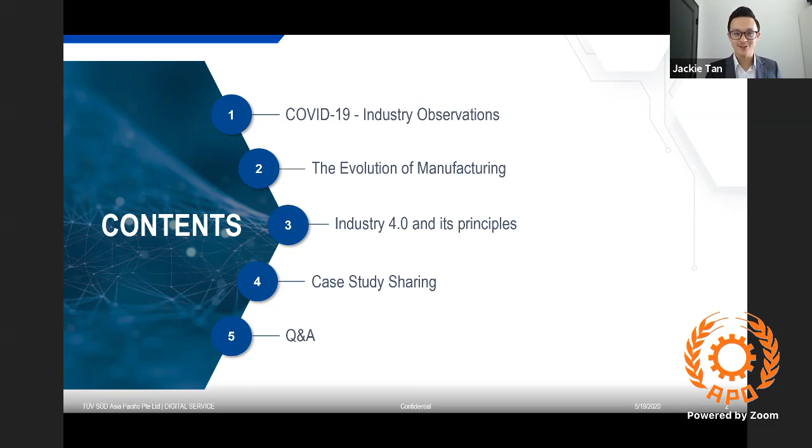First of all, industry observation in this pandemic time. So what do we see right now in this pandemic time?

What we believe is that 41% actually are trying to identify where and how they could start their transformations. We also see that 41% of manufacturing really lack of focus. They struggle or they're struggling to understand what is actually Industry 4.0. And due to this pandemic time, there's a lack of focus for companies or even for manufacturers to identify projects.

Based on our observation, we see companies right now are working on ad hoc projects, and very much we see companies are really working on silo projects to address current needs. In addition to that, we also see companies are having difficulties in resource management. Due to several instances, we also see that companies are struggling to manage their workforces and to manage the supply chain. And very often, companies are acting with an unclear and reactive approach in this pandemic time.

Now, beyond that, we also see that 23% actually of companies right now are in the midst of defining a blueprint, how they could transform their organizations. Now, this 23% may seem relevant, but we also see that many companies have missed the opportunity, or in fact, they are missing the opportunities because simply there's a delay in them defining a roadmap or even defining what is relevant for them.

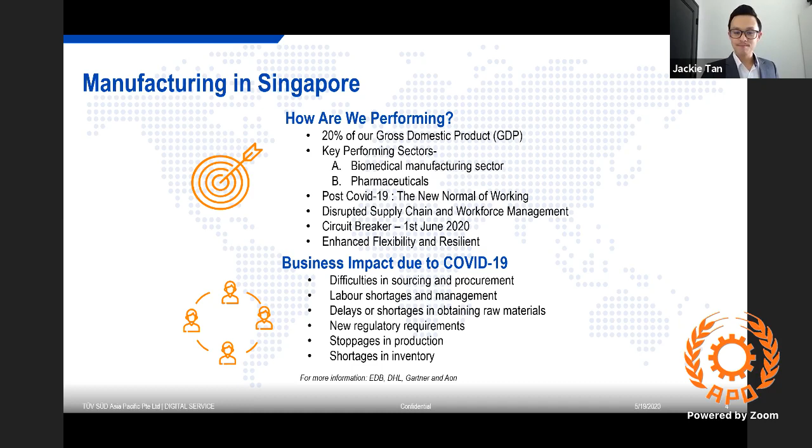Now I would like to share with you a slide. What could be the future of manufacturing? If you were to see my slides right now, there are about 7 points or 7 business functions that I'd like to share with you.

They are namely IT and data collections, manufacturing process and design, asset and equipment, quality, supply chain management, workforce management, and finally enterprise processes.

I will go through one by one just to share with you what is the current state and what could be the potential future state, due to digitalizations or even due to moving into integrations of Industry 4.0 to the specific business function.

Number 1, for IT and data collections, currently we do see companies are still collecting data offline using analog tools, and they use IT systems to improve critical operating parameters. There are companies today, and largely companies today, especially the SMEs, are still working using offline data collections and IT systems to improve critical parameters.

And in the future state, we also see companies have now deployed real-time system analytics and intelligent sensor control to enable flexible manufacturing operations. So if you would like to really push your factory, transform your factory towards what we call flexible operations, do look into how you could achieve real-time system analytics and intelligent sensor control for your factory. That is where we see what could be the future state of companies, and we have seen this actually deployed in several factories.

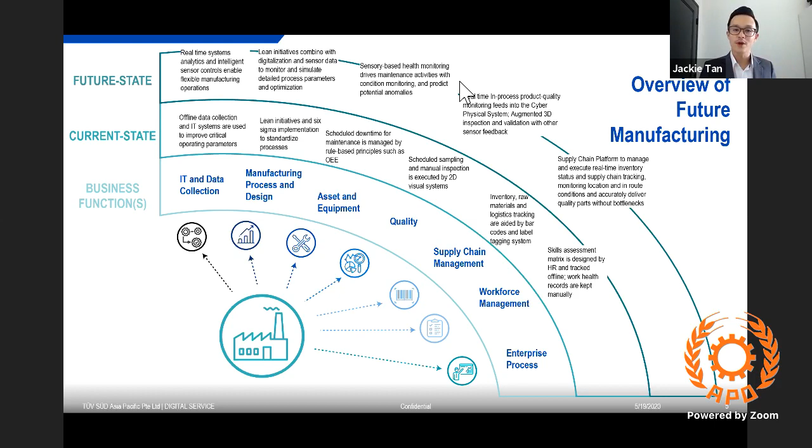Workforce management: typically we see companies deploy skill assessment matrix tools, which is just basic enough for companies to know whether their workforce is capable or able to perform certain tasks.

As a future state, we see companies have deployed regular continuous workforce management, and there's also real-time monitoring of workforce health management using RFID tech or certain sensors, to ensure the workforce is always ready to perform certain tasks.

Finally, enterprise processes. Today, many enterprise processes are performed using analog tools such as Excel, paper-based methods, or even emails. Enterprise processes are typically your administrative tasks.

In this pandemic time, this is the biggest challenge for companies, because very often we are used to pen and paper, emails, phone call communications. And when it comes to less face-to-face meeting, there's a need for more effective digital tools to foster enterprise management.

This is where we have seen companies now automate enterprise processes using computer-based systems. My recommendation for you is to look into how you could deploy robotics process automation in your organization.

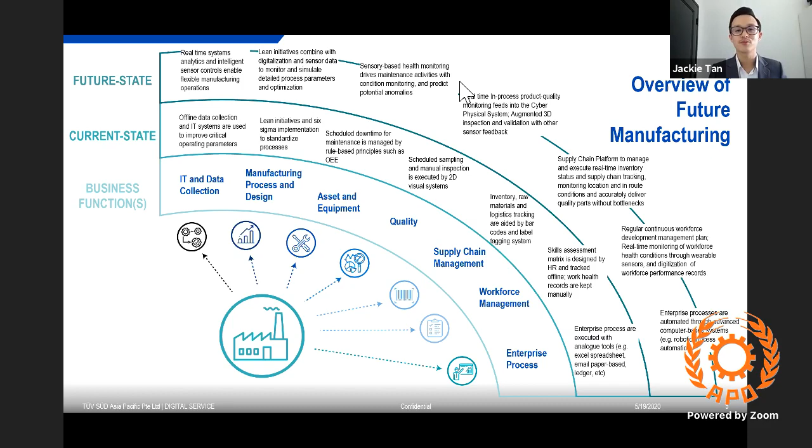Now I will just quickly touch on the concept we call horizontal integration. If you are a company that really wants to adopt a resilient or flexible supply chain, horizontal integration will be a key concept for you in order to adopt this resilient supply chain.

What we mean by that is a concept where companies should look into how they could optimize the flow of data and products from suppliers through the company and to the customers.

The benefit simply is that it helps companies improve and increase their supply chain resilience, such that they are able to monitor real-time performance of their upstream suppliers all the way to the downstream customers.

Second point, it helps you improve your workforce efficiency, such that as a company you are able to plan and execute processes more efficiently and even with real-time execution capability.

Third point, agility. If you were to adopt horizontal integration, it really helps you be agile. It enables you to make real-time decision making via simulation of scenarios.

There's a lot of information in this topic. Unfortunately, due to time constraints, I'm not able to share with you more about horizontal integration. I hope to have the opportunity next time, together with APO, to give you a masterclass on what horizontal integration actually is. But if you want to do your own research, check out what we mean by horizontal integration, especially in the context of Industry 4.0.

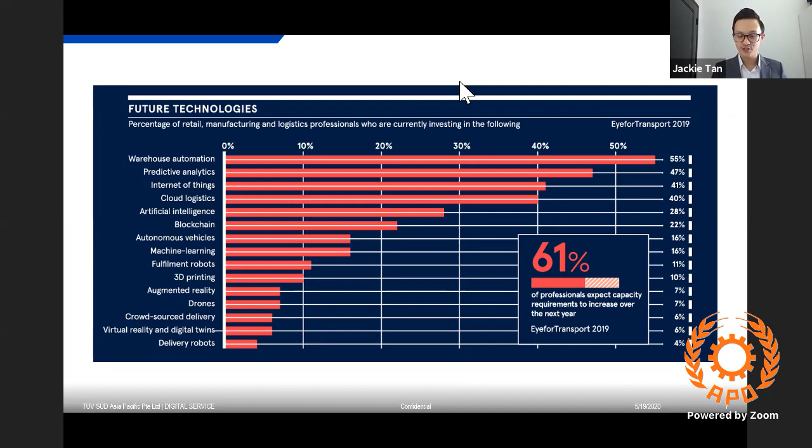Now let me share with you a quick case study about a flexible supply chain deployed by one company. This company is a German company - as you know, TÜV SÜD is also German, but this is a different German company. They have about 33 factories globally and about 47 warehouses globally as well. They produce fast-moving consumer goods, ranging from beauty care to laundry and home care, so some of the products you see might be easily recognized by you.

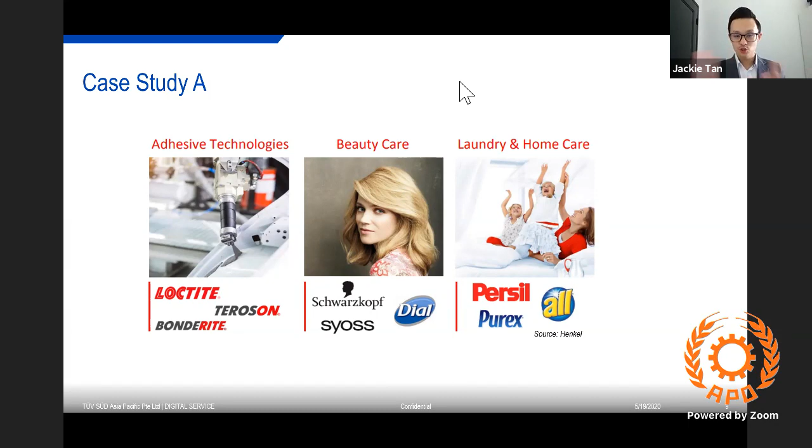This is one of the case studies where they deployed a supply chain platform to enable end-to-end digitalization. This company is a world-leading chemical and consumer goods company. Their major divisions are laundry, home care, adhesive technology, and beauty care. So this is typically an FMCG company.

One of the key challenges back then was that market demand required them to be faster, cheaper, and have more agile processes - no longer very rigid production processes. There's a demand due to fast-moving consumer goods; they have to be faster, cheaper, and more agile. There's also a need for them to improve OEE.

Very often, every factory has their own OEE, and they would like to know how they could monitor OEE across all 33 manufacturing factories. Of course, since they are making chemical products, there's a need to look into how they reduce specific energy consumption and further enhance sustainability.

The third point - the company has a challenge to look into visibility and transparency. There's a need to adopt an agile and lean approach to ensure they don't get left behind in a competitive and dynamic market. So these are the top 3 challenges the company would like to address as part of their transformation towards Industry 4.0.

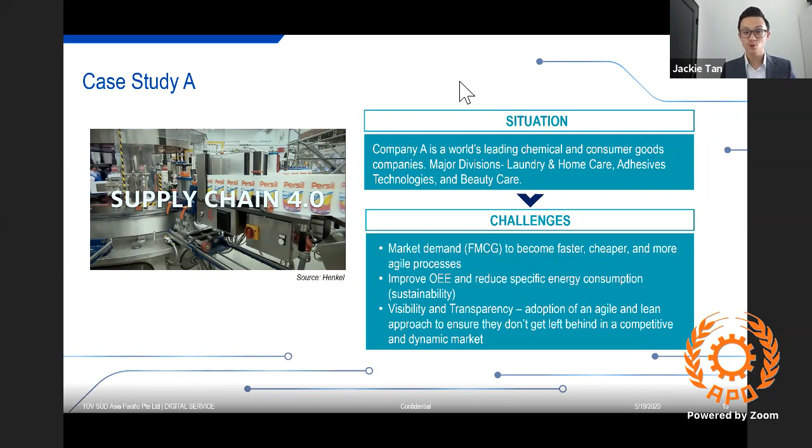What they deployed was a digitally enabled real-time global OEE boosting platform. For those not familiar with the term OEE, it represents overall equipment effectiveness. There's a specific calculation behind it, but just keep in mind it stands for overall equipment effectiveness - it shows you how effectively your assets are performing.

This company deployed a platform that connects all shop floor assets, machineries, and computer-based systems using IoT gateways, such that data gathered from the shop floor across the 33 factories is continuously analyzed remotely. Many companies say we are able to monitor our factory OEE and know the performance of assets, but when we ask are you able to do it remotely, that may be a challenge for you as well.

So this company not only deployed OEE systems for their factories, but is able to monitor the OEE of assets remotely. Keep in mind the keyword - how do you monitor your assets, machinery, and computer-based systems remotely? Second, they also deployed a digitally integrated end-to-end demand sensing system, which touches into the supply chain arena. What they did was deploy cloud computing to integrate factory processes and warehouse data for real-time production and supply chain visibility.

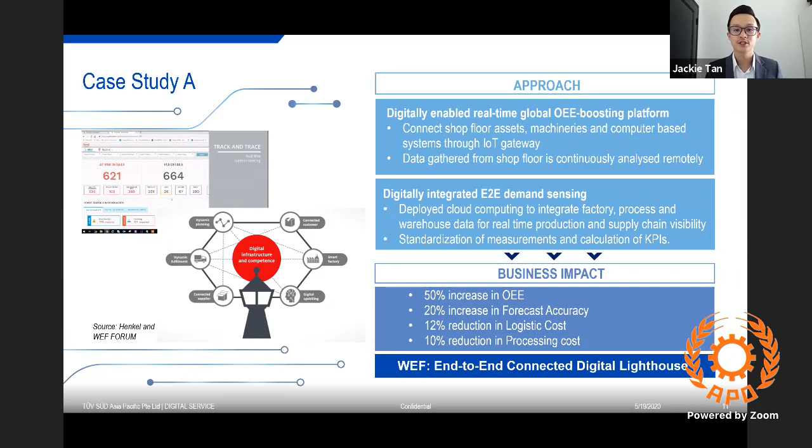So keep in mind, if you want to go into what we call digitalization, it's not about deploying AI, predictive analytics, or digital twins. It's really about how you are able to monitor your factories real-time, or even remotely. That will be the minimum I recommend for you as a company. How could you achieve monitoring of your organization or your factory remotely in real time?

Now, a quote from this company, Henkel, actually that's a company name called Henkel. How Henkel is using a supply chain platform to navigate the ongoing COVID-19 pandemic. So this is a quote from them actually. Let me go through it with you.

Having a supply chain platform means that we are able to use real-time data and generate insights to maneuver through the COVID-19 crisis as smoothly as possible. All of our major KPIs are online, so managers can easily access them from home, which greatly benefits their businesses in this unprecedented time.

They also rapidly built a number of new reports using the system to assist with these efforts. This includes a dashboard to monitor their global stock of PPE, personal protective equipment, ensuring companies and employees are properly protected throughout the facilities. They have also created a sales and operations planning dashboard that managers can access remotely.

Again, I've been saying the keywords here, remotely and real time, right? To support the alignment between the different business requirements. So think about how you could monitor your supply chain, your operations, your factory, and your logistics in real time, remotely. That's what they achieved to maneuver during this pandemic time.

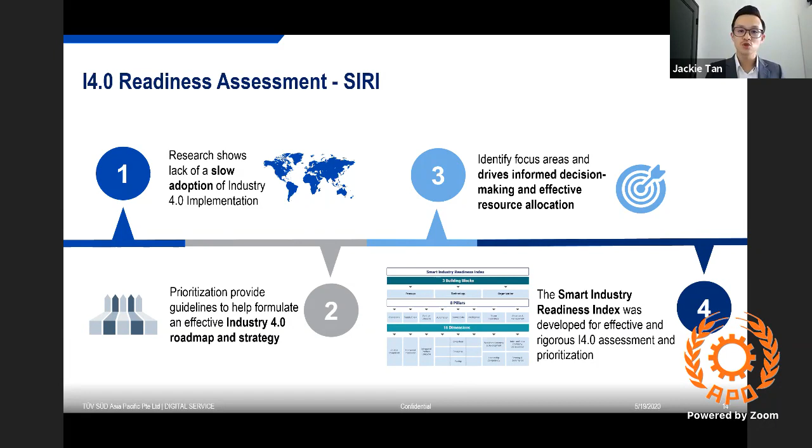As a company, TÜV SÜD, we also work closely with the Singapore Economic Development Board to launch the Smart Industry Readiness Index, to help companies effectively and rigorously evaluate their Industry 4.0 readiness, and also to prioritize key focus areas. So that's what we have done by deploying an Industry 4.0 readiness assessment using the tool called the Smart Industry Readiness Index.

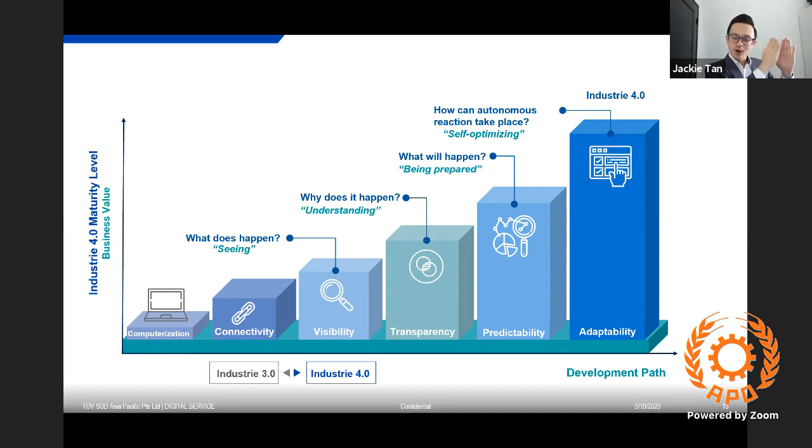The objective here is really to help you grow, to migrate from computerization all the way to self-optimization. This is the journey where we see companies typically moving on from Industry 3.0 to Industry 4.0. Unfortunately, due to time constraints I couldn't elaborate more, but generally we see the trend of how companies are migrating from Industry 3.0 all the way to Industry 4.0.

We did, together with the Singapore Economic Development Board, an analysis of the current gaps based on our assessments of companies. And believe it or not, largely, the biggest gap we see is connectivity, right? That ties into real-time and remote. And this is where we also see that this gap is definitely, certainly, present in many companies.

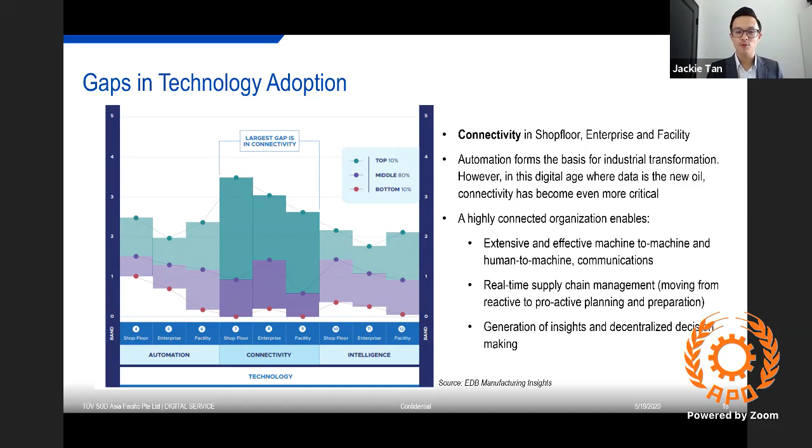We also recommend connectivity should be a key topic for you should you want to adopt Industry 4.0. Having a real-time connected organization could be beneficial in this pandemic time, and even for you to effectively manage and optimize your operations, be it your shop floor operations, your enterprise operations, or even your supply chain operations.

With that being said, I'll come to my last slide before I pass the mic back to Ted. Just bear with me for one more minute. We do want to recommend, if you want to adopt Industry 4.0 in this pandemic time, or even to improve your company's competitiveness, look into a three-step approach.

Number one, initiation. Start to develop your own understanding of Industry 4.0, having a benchmark to know where you are compared to your peers, and identify your gaps.

Point number two, solutioning. Really start to define what could be the vision of your factory, the vision of your organization, and define what could be the future steps. It's only when you know your vision, only when you know what you'd like your future steps to be, that you can identify the relevant projects and the relevant business impact to your organization.

Because at the end of the day, we will not deploy any solution if there's simply no ROI, return on investment. So keep that in mind. There must be a vision and future steps before you define the relevant projects and the respective return on investment.

Third point, implementation and operations. It's only when you have a clear vision and a clear ROI that a company can start to implement specific projects to ensure seamless integration—integration to your current operating model. So these are the three-step approach we wanted to recommend to you as part of your transformation, or as part of your digitalization journey towards Industry 4.0.

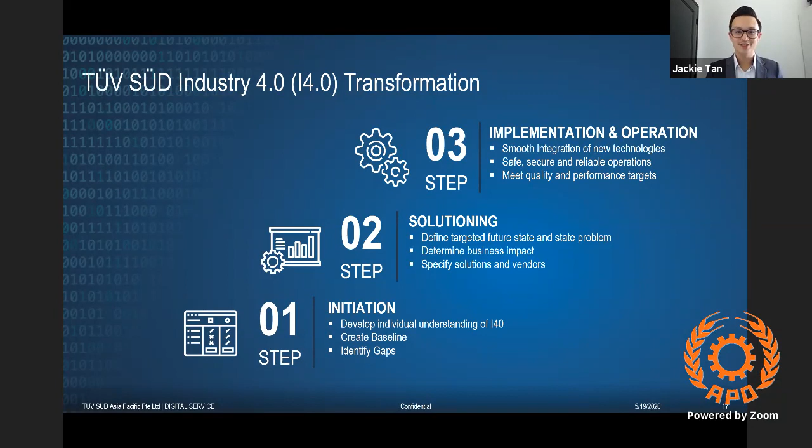And with that, I came to the end of my slide. Thank you very much for your time. I hope you enjoyed my sharing and what you could do to minimize disruptions in this pandemic time. So back to you, Ted, and thank you very much.

Thank you, Jackie, for the wonderful presentation. I'm sorry we didn't have too much time for that, but I think you managed to share a lot of information and insights on this topic. If I may, I think it's really an interesting and impressive presentation, because I think Jackie is trying to address two layers of issues: one is how to respond to this COVID-19 situation, and the other is, in the long run, how do you actually address the issues about productivity and performance in the manufacturing sectors. So I think it's a brilliant presentation.

And if I may, these are my notes from his presentation. I think in this sharing, resilience is actually built on the information or knowledge of our vulnerability, and flexibility and agility are the key to respond to changes and crises. And to do that, digitization may be the first step to collect the information and knowledge, and other technologies may be employed to further build resilience and performance. It may be realized into a more decentralized situation in the supply chains.